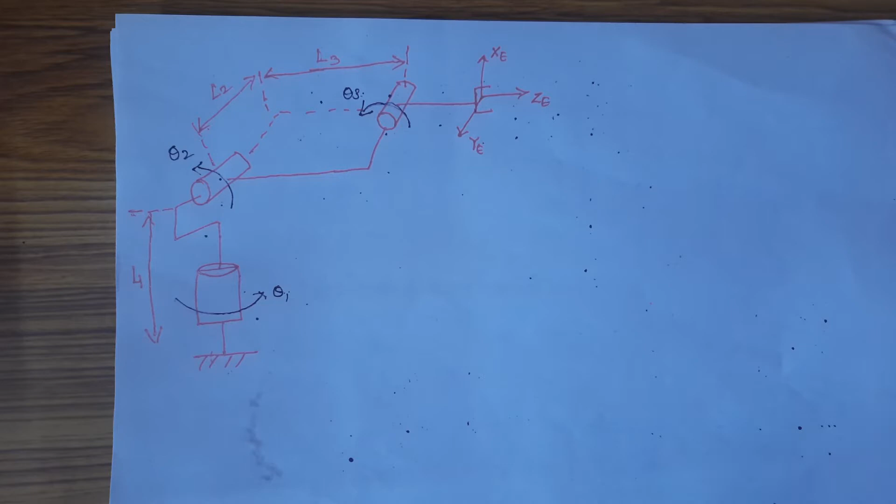Hello guys, so this is one of the problems that we are having. We'll be having three joints, one, two, three, and we'll be having the link lengths. We need to find out the first thing we have to do: assign the frames for the three joints, then draw the DH table, and third we have to go for the transformation.

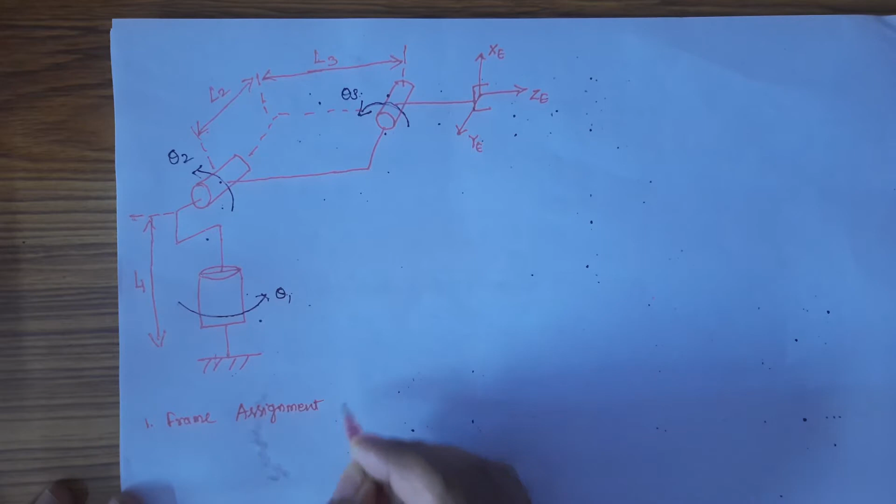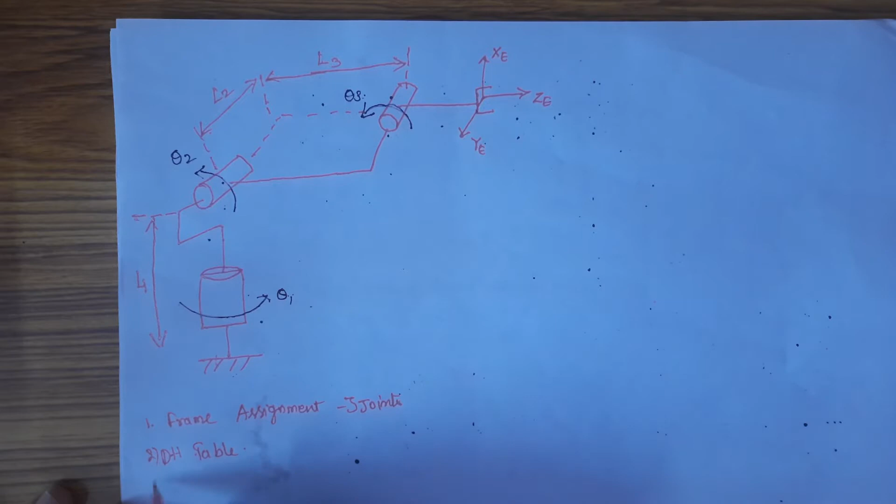So we have to do the steps one by one. The first one will be the frame assignment for three joints, and the next one will be the DH table. Third one will be the transformation matrix. So let us start with the first step.

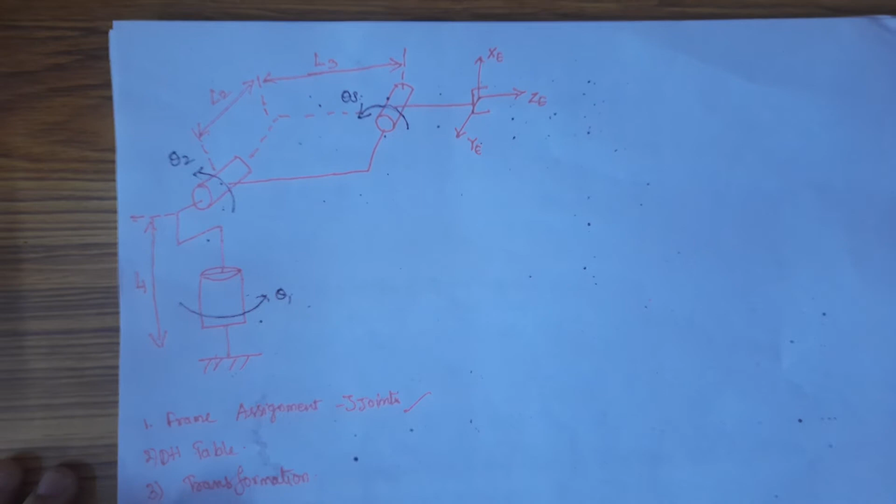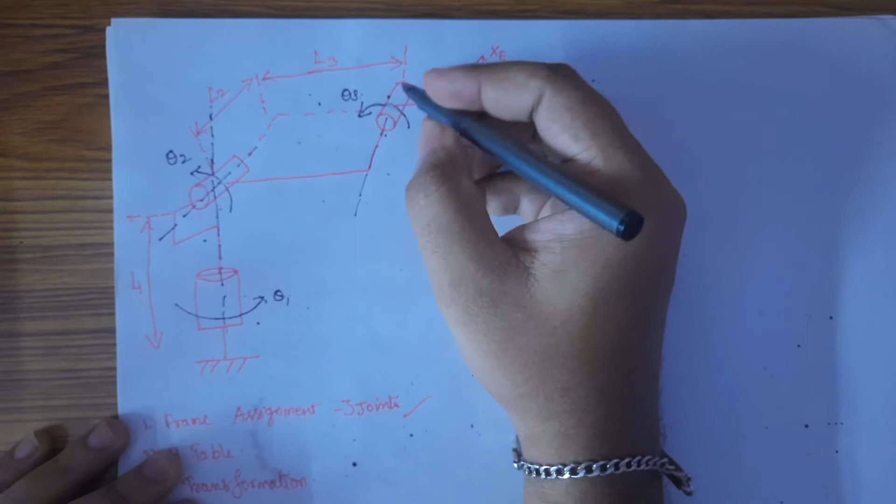So this is the figure that we are having. We have to draw an axis like this, so this is the axis that we are having, and this is one more axis. We know the rules, right? So we have the three axes here, with the angles theta 1, theta 2, and theta 3, and we have to first go for assigning the z axis.

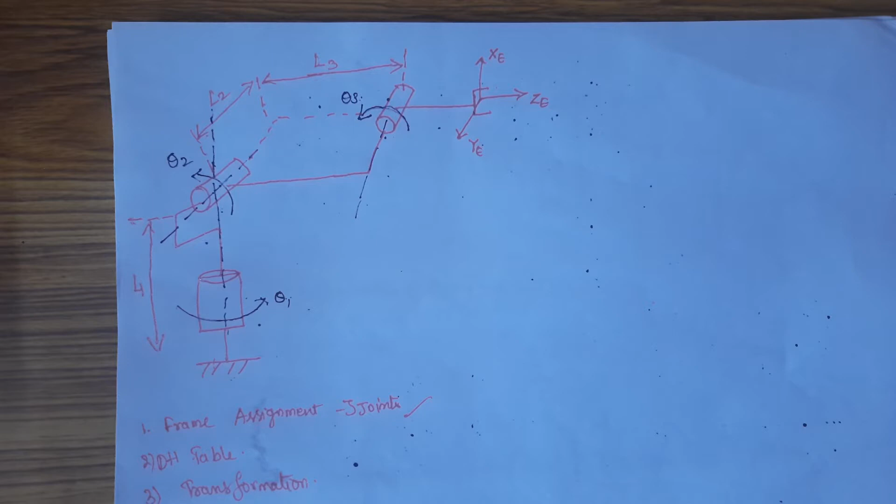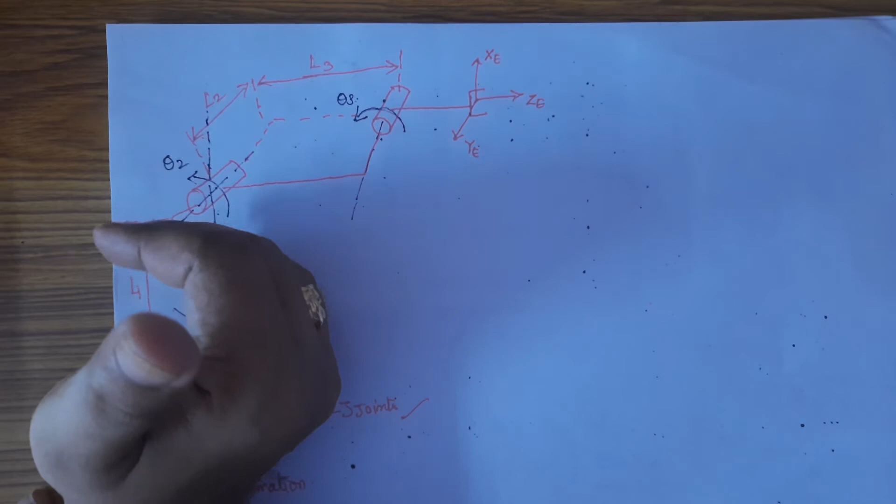The z axis will follow the right hand thumb rule. So as it is like this, our right hand will be closing like this, and the z axis will be pointing in an upward direction. So the z axis will be in the upward direction.

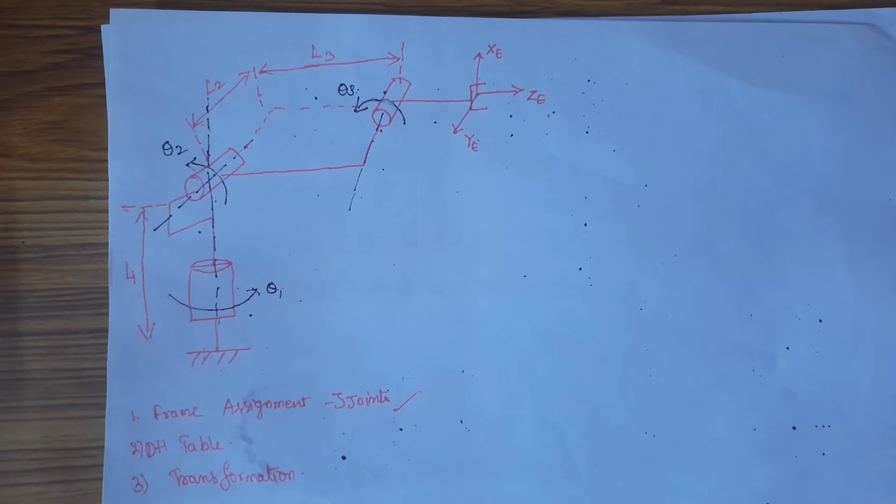Later the rotation is like this, so then the z axis will be like this. Again the rotation is like this. In these rotations, we will be taking the anti-clockwise direction as positive and the clockwise direction as negative. Just follow those rules.

First we have to take the right hand thumb rule, and the fingers will be pointing in the theta direction, whatever the fingers are doing, that follows the theta direction, and the thumb will be the axis direction. So this will be z1, this will be z2, and this will be z3.

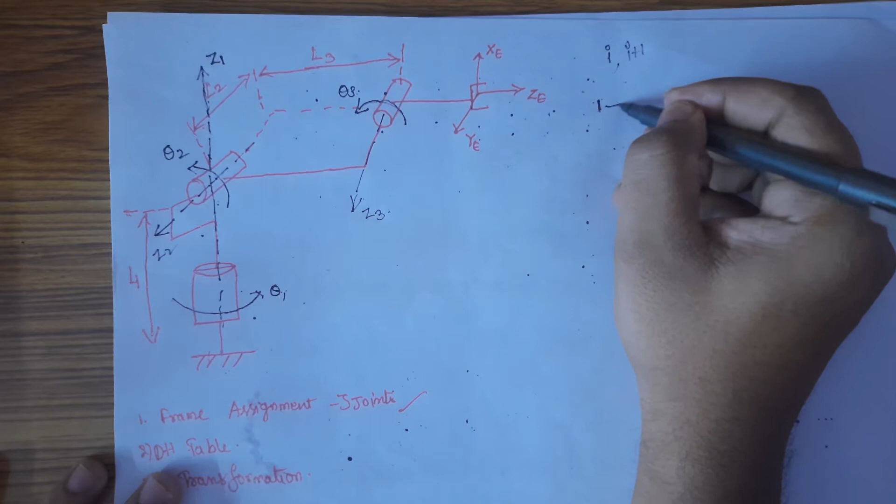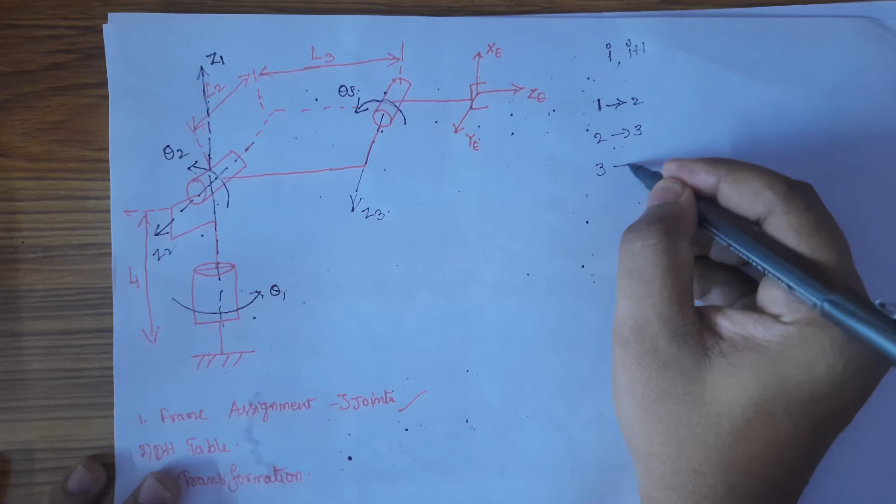These are the three things, and the tool position is already given. We have to follow the rule of i and i plus 1. That means when we are considering joint 1, we have to consider joint 2 also. When we are taking joint 2, we have to take into consideration joint 3 also, and when we are looking at joint 3, we go for the last one. These are the steps we need to follow while assigning the frames.

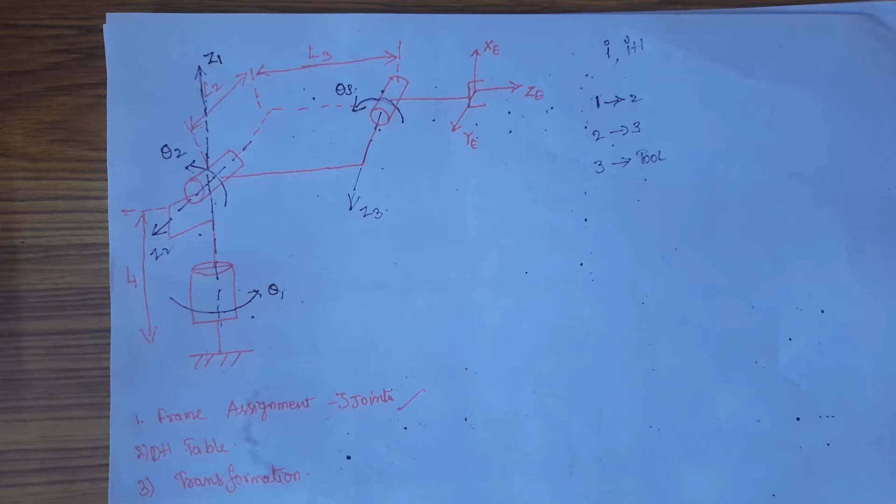So if you go for the origin, this will be the origin, as it is connecting the two things. While going for the first joint, this will be the starting point, and we have to assign the x-axis.

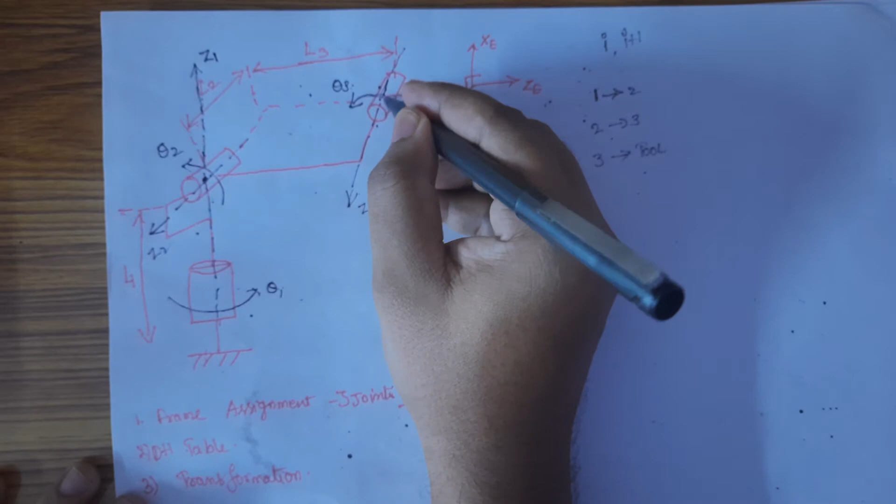While taking joint 2, we have to consider joint 3. So here will be the origin for joint 3, and we have to consider the x-axis. The x-axis will be perpendicular to the z-axis. So z1 is like this, and we have to draw the axis like this, so this will be x1. Since z2 is like this, we have to follow the same thing, x2.

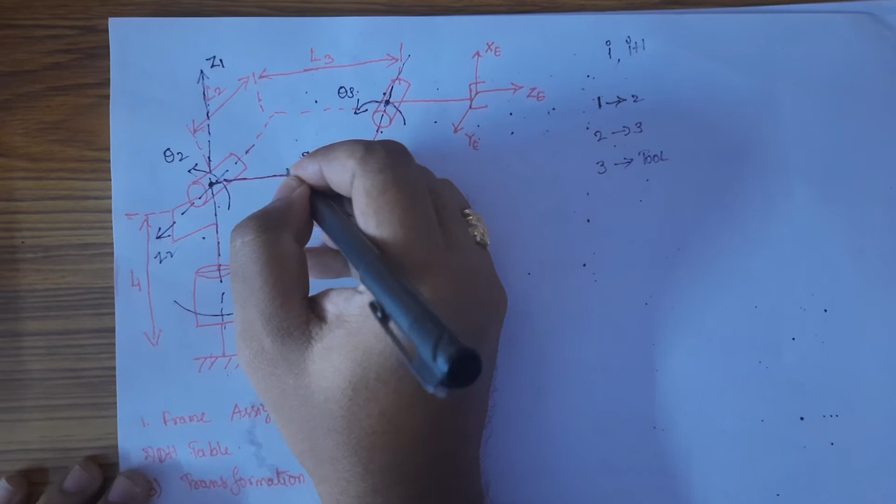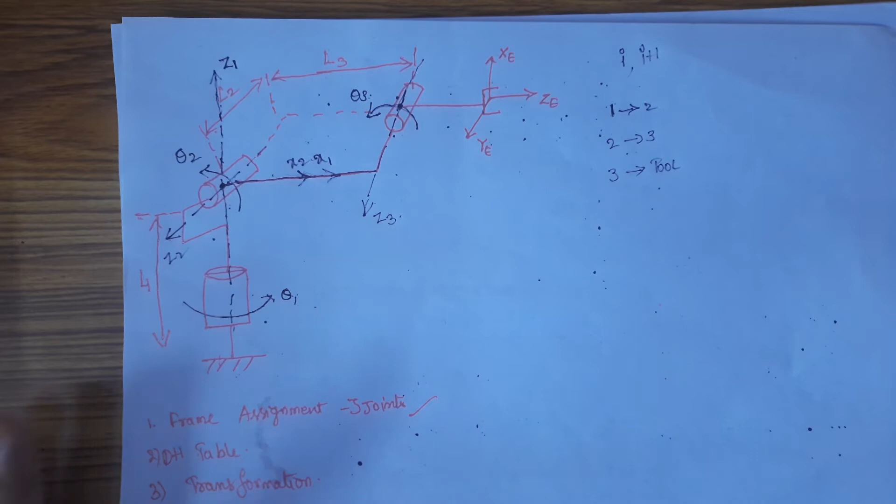So we have to draw a common perpendicular to z2 and z3, and this will be the x-axis. The x-axis will be perpendicular to the z-axis. Just remember that rule, because always keep it in mind: if two axes are intersecting, then the x-axis will be the normal to it.

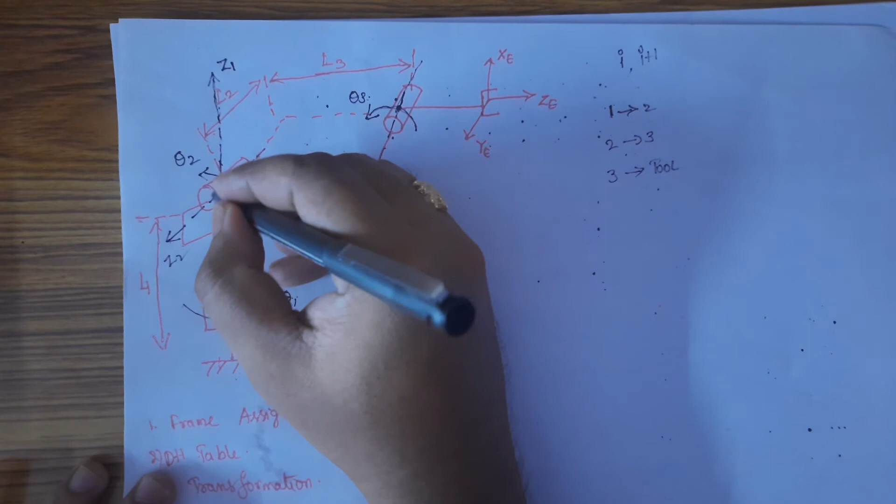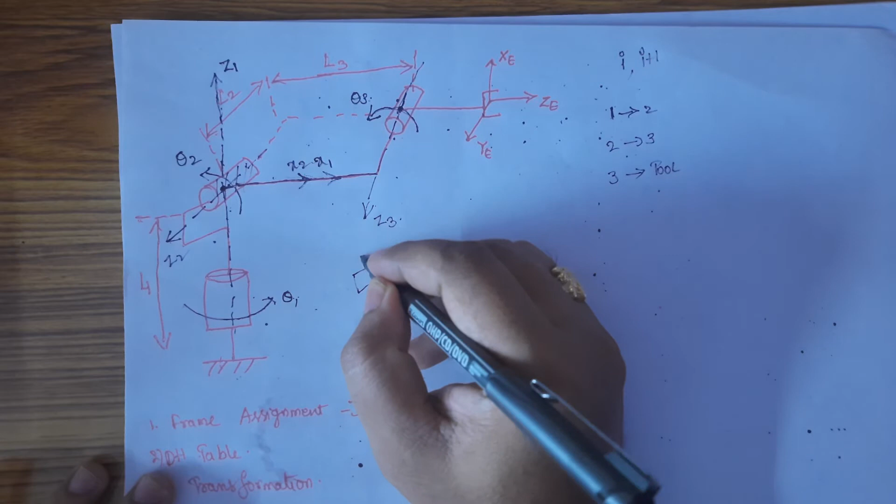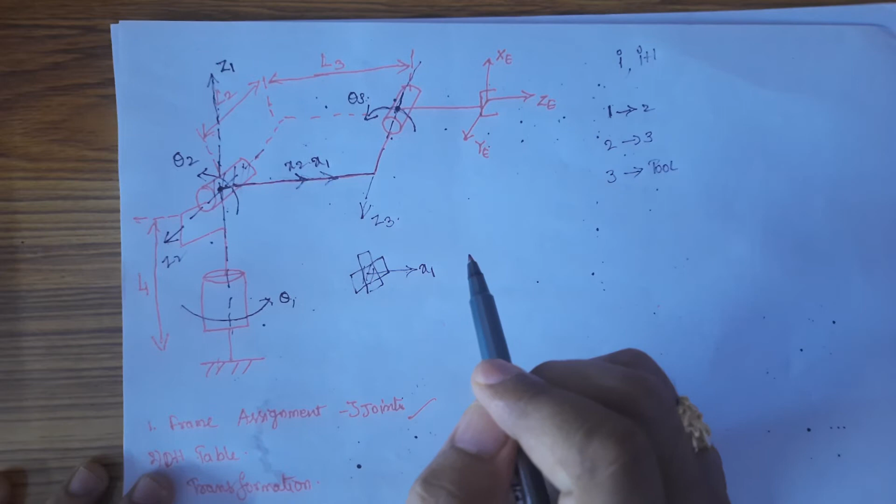We already know that rule, as the two axes are intersecting here only. Suppose we are having a plane like this and one more plane like this, and both are intersecting at this point, so we will be drawing the common normal to that. The x-axis will be in the common normal direction, that's why we have taken it in this direction also.

So we have to keep both the rules in mind: the x-axis must be perpendicular to the z-axis, as well as if the both axes are intersecting in a single plane, then the x-axis will be normal to that. We have to keep these rules in mind.

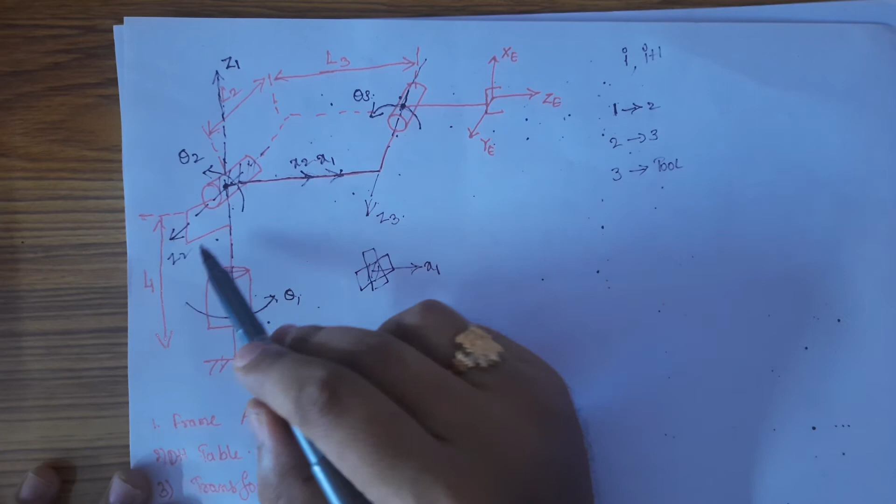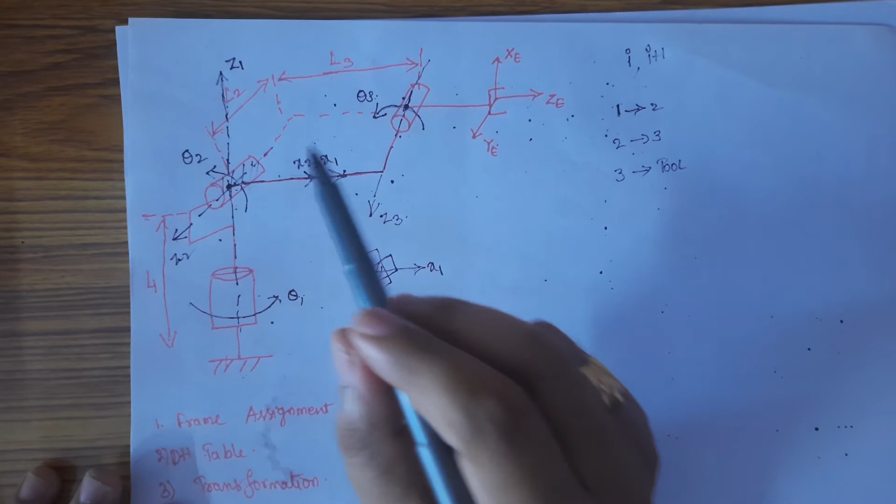Okay, so as we have taken 1 to 2, we have drawn it as x1 here. And if we go for 2 to 3, that is z2 to z3, we will be drawing one common normal and common perpendicular to this, so that the least one we will be taking as the line as the x-axis.

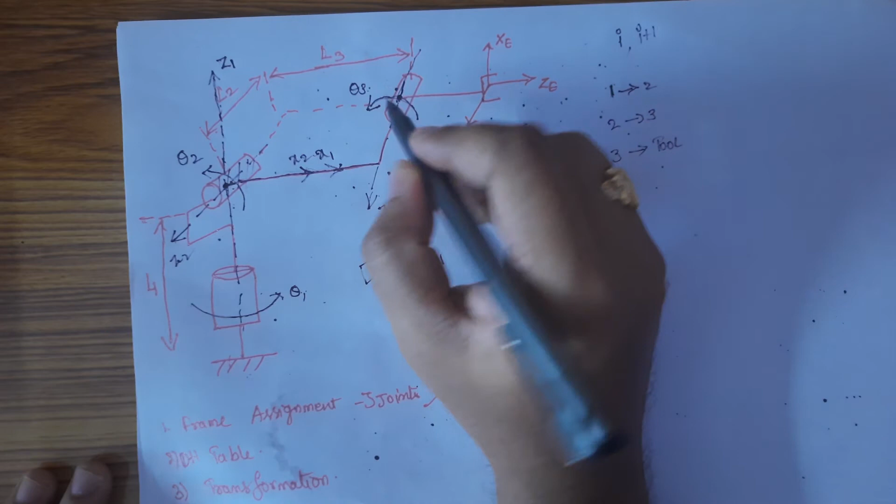Okay, so coming to here, if you consider the third joint, just see here, we'll be having a plane like this, and we are having the plane like this. So we will be having a common normal like this.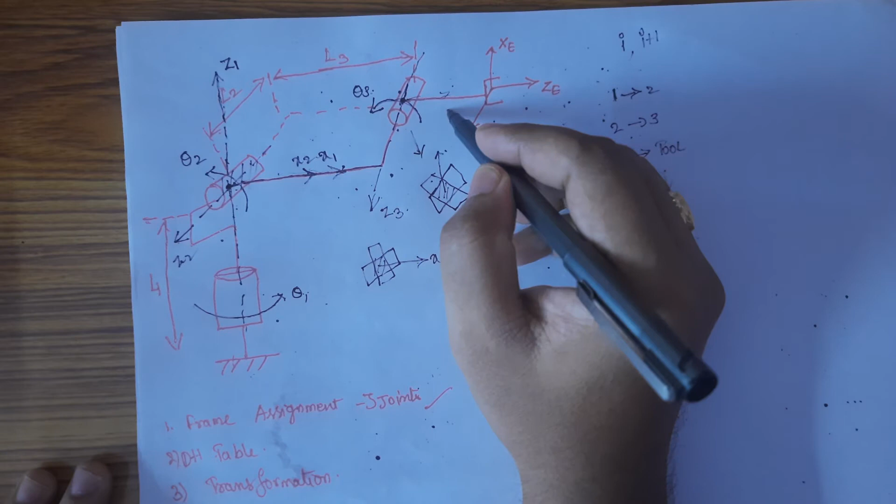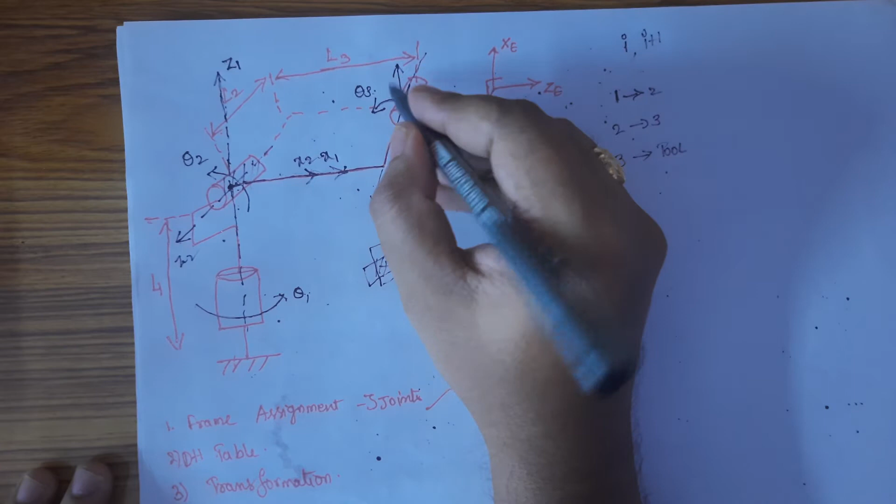Okay, so always remember the x-axis must be perpendicular to the z-axis. If we draw like this, this won't be perpendicular to this z-axis, it will be parallel instead. So we should not draw that. That's why I am going for drawing the x-axis perpendicular to this, that is x3.

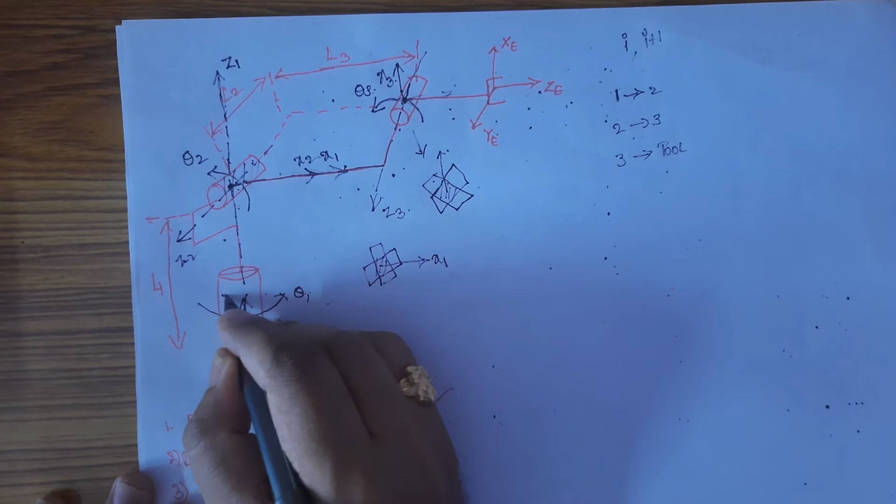So we'll be assigning the bottommost, that is z naught here. Z naught is like this, and x naught will be like this.

So the next step will be finding the DH table. You already know how to draw that. So we'll be taking the links in the first column: link 1, 2 and 3.

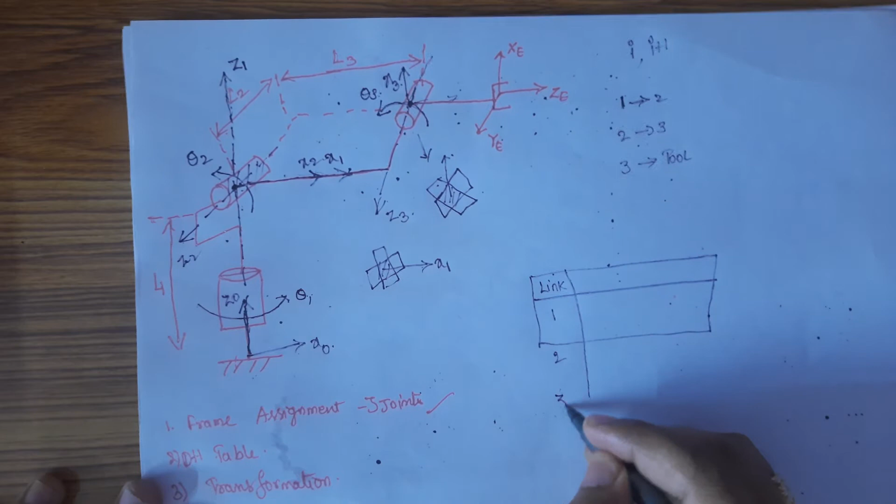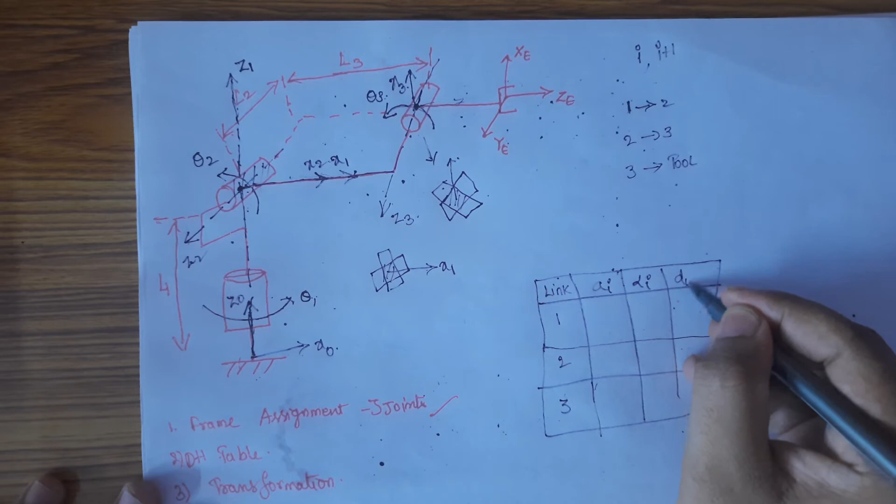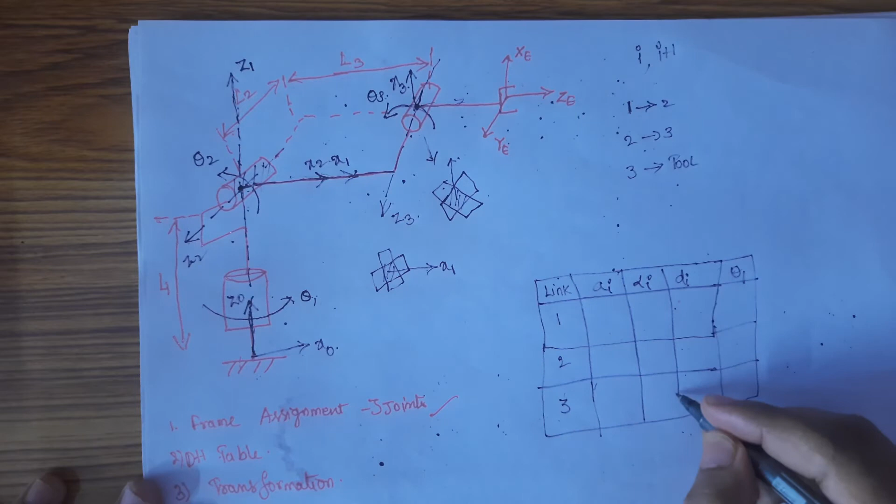Right, so next we'll be taking as link length Ai, alpha I, di and theta I. So these are the four parameters that we need to know.

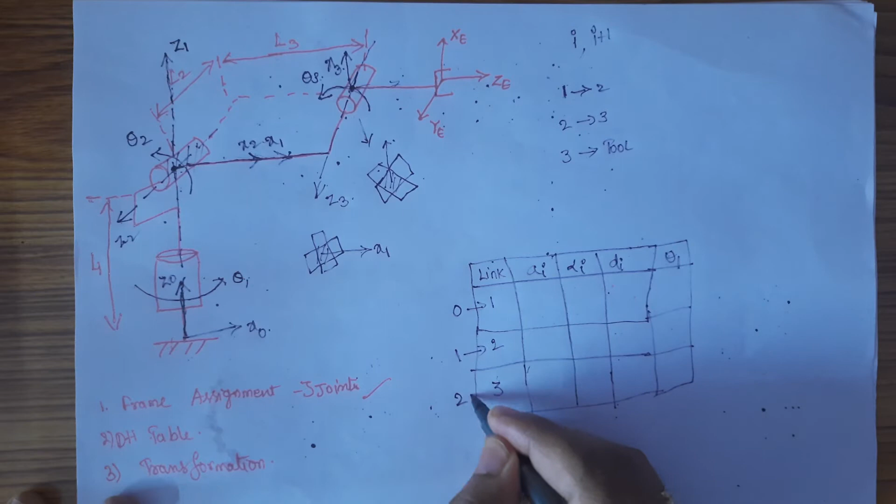So the first link we are taking as 0 to 1, 1 to 2, and 2 to 3, that's what we will take it as. So the first one is 0 to 1, that is nothing but link 0 to 1. So we'll be having a link length of 0 to 1, which is L1.

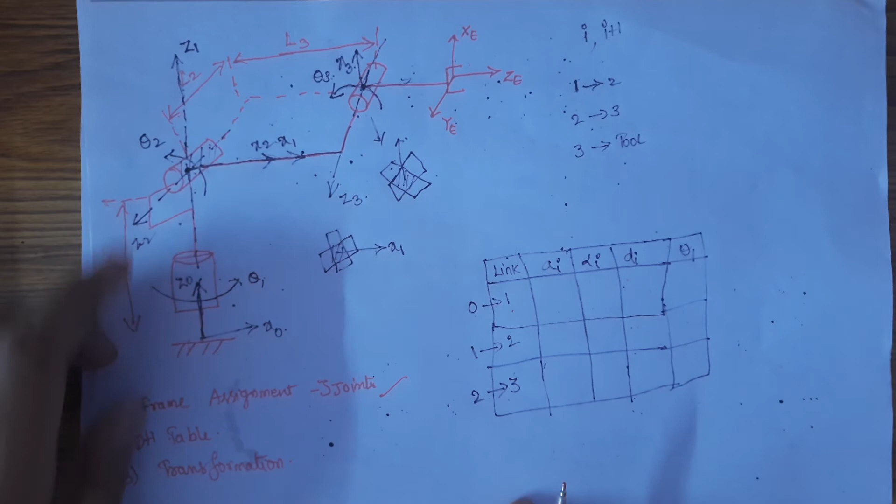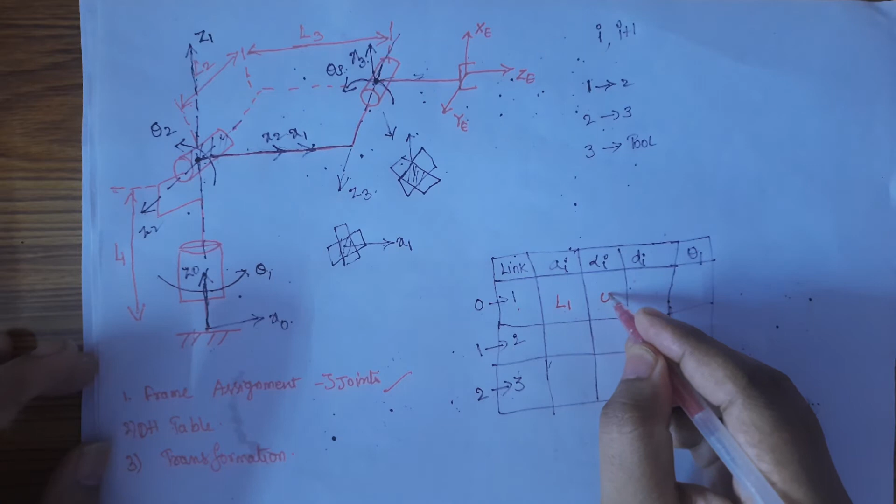So we don't have any offset distance, so the link offset distance will be 0.

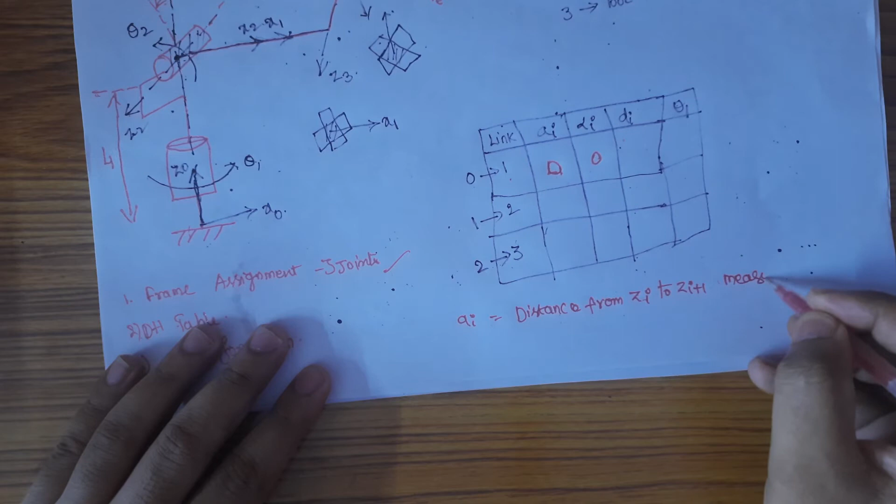So let me tell you some rules here. So Ai is equal to the distance from zi to zi plus 1, measured along xi.

Okay, so next will be alpha I, that is angle of twist, from zi to zi plus 1, measured along xi.

So the next one will be di. That is the distance from xi minus 1 to xi, measured along zi.

Okay, so the last rule will be theta I. Theta I is the angle from xi minus 1 to xi, measured along zi.

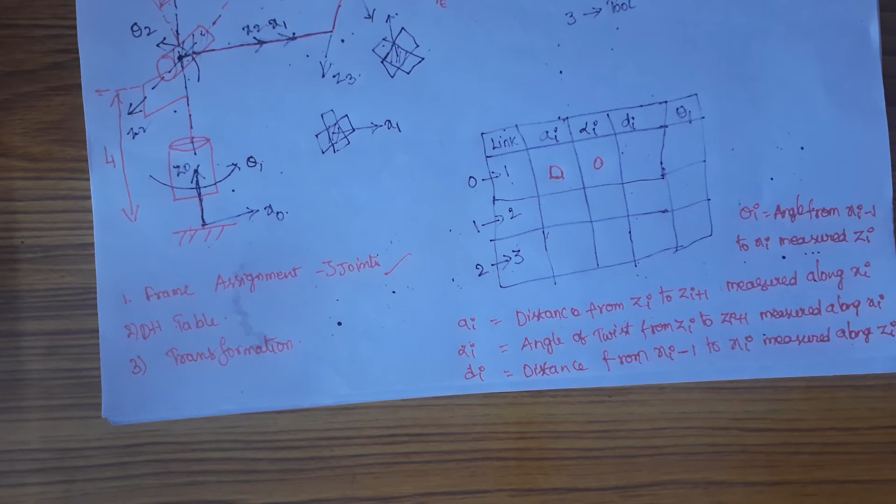Right, so these are the four rules that we need to follow. So the first thing we'll be considering is i equal to 0, and next we are going to consider i equal to 1.

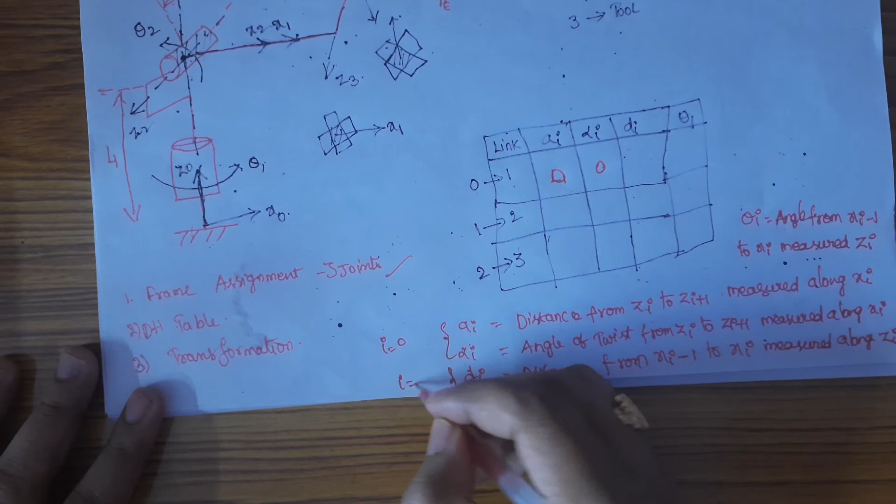Okay, so Ai is nothing but the distance from zi to zi plus 1. So z naught to z1 measured along the x-axis, we'll be measuring along x naught, that is the distance from z naught to z1.

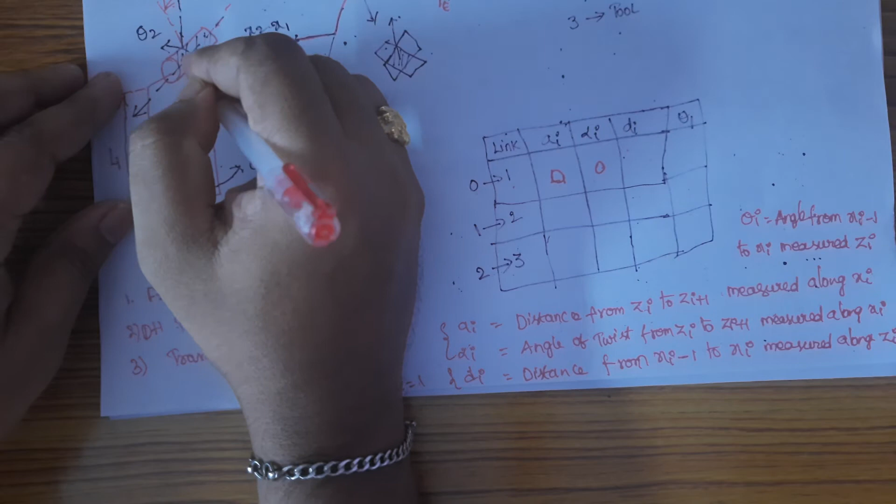Since both are in the same plane, both are in the same line of action, so we don't have any length. If it is in the same line of action, there won't be any distance, so that's why we have taken it as 0.

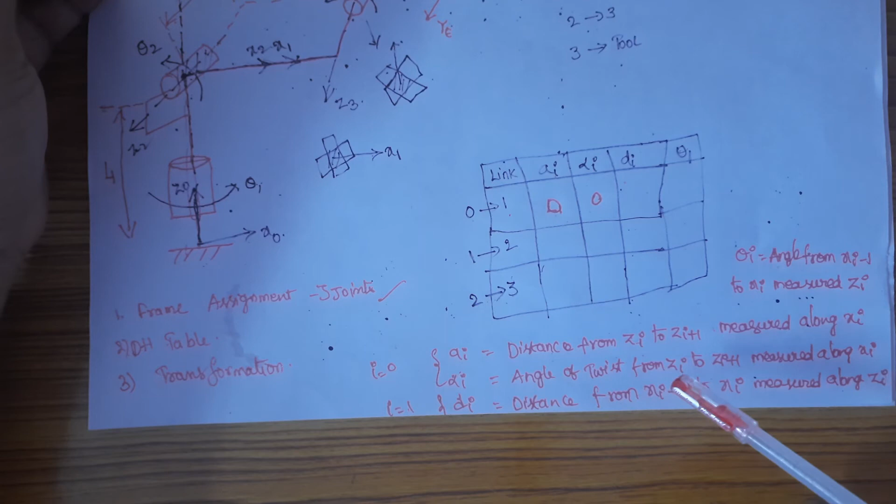And alpha I is nothing but the angle of twist from z0 to z1, measured along the x0. So we don't have any type of twist to reach z0 to z1, so we will take it as 0.

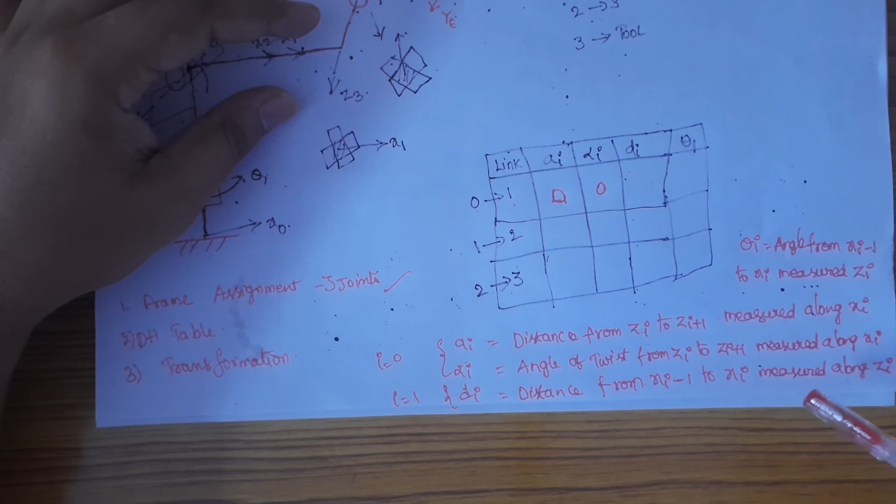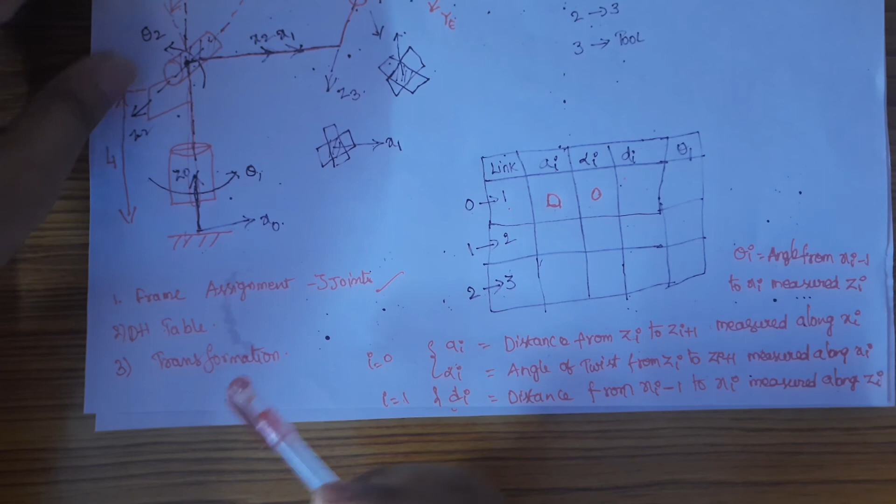And the second thing is distance, that is di, nothing but 1, so x0 to x1, measured along z1. So what distance is there from x0 to x1, measured along z1? That will be L1.

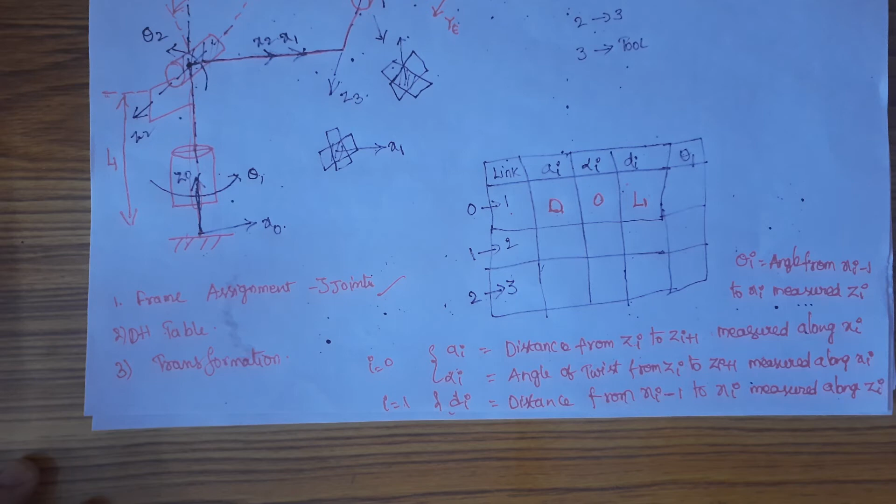So this is how we are going to take the DH table. So the last one will be the angle from x0 to x1 measured along the z-axis. In order to reach x0 to x1, we will be having some angle here, that is theta 1.

Okay, so the next thing is the second link. So 1 to 2 we will go to measure.

So here i is equal to 1, we'll be making it as i is equal to 1 and i is equal to 2 for the next 2 terms. So ai is nothing but the distance from z1 to z2 measured along the x-axis. So z1 and z2 are in the same plane, so that's why we are going to take it as 0. Next, angle of twist from z1 to z2 measured along x-axis.

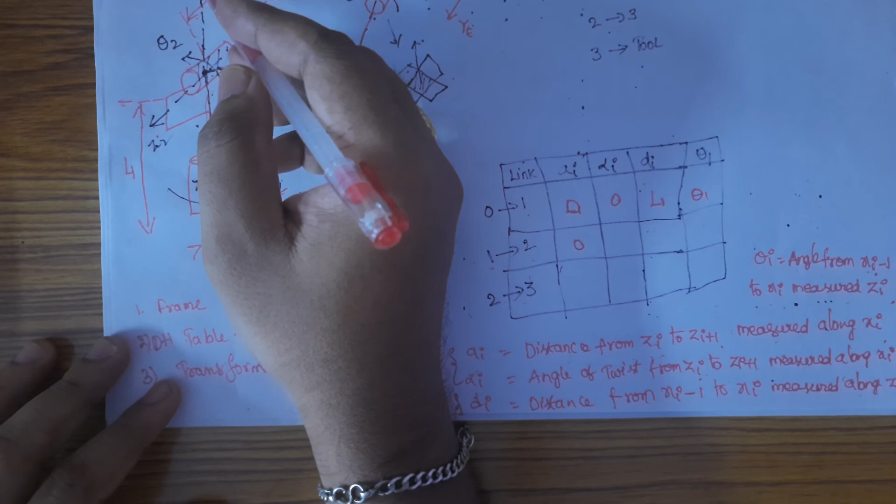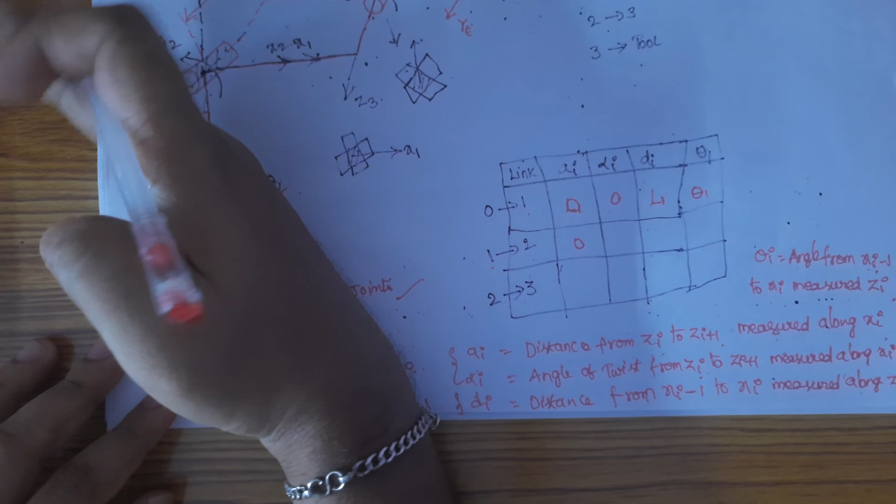So here z1 is in the upward direction and z2 is in the downward direction. In order to reach z1 to z2 measured along x-axis, we have to rotate something like this, so we'll be having some twist here. The twist will be taken as 90 degrees, and this will be plus because we have to rotate it in the anti-clockwise direction to reach z2.

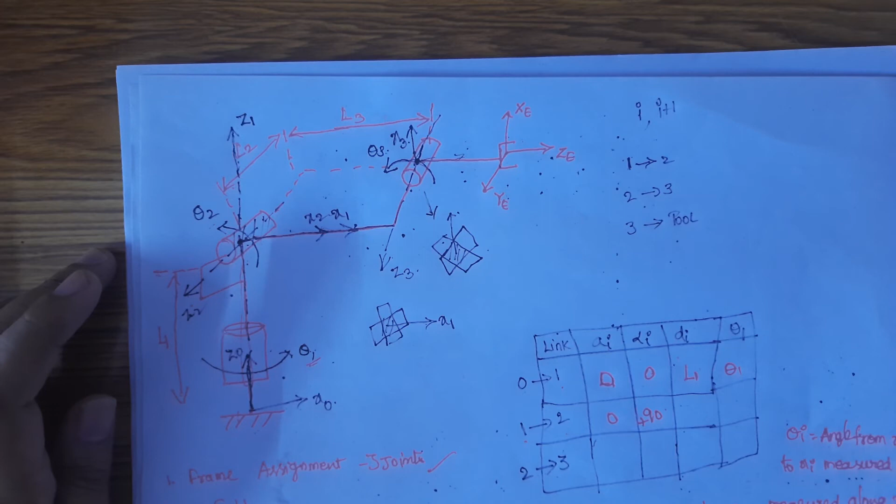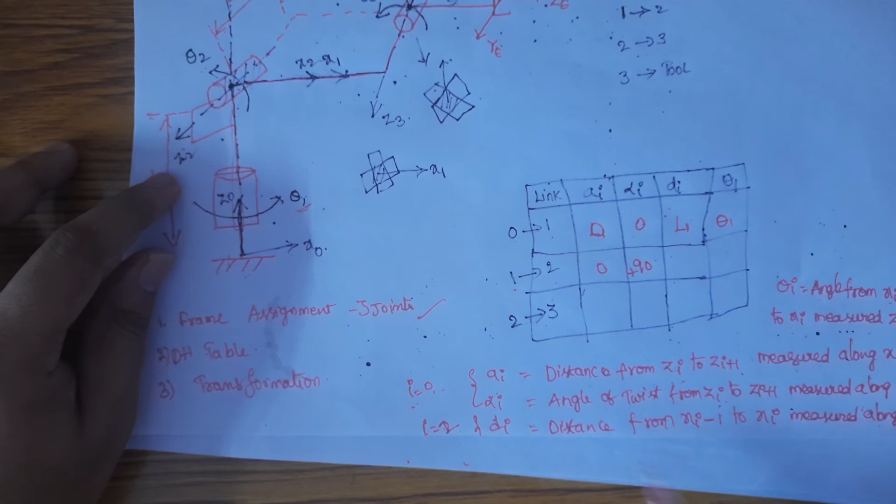So what is the distance from here? The i value will be 2. So distance from x1 to x2 measured along z2 - in order to make this third rule, di, distance from x1 to x2 measured along zi. So x1 to x2 are both in the same plane, so we have to write 0.

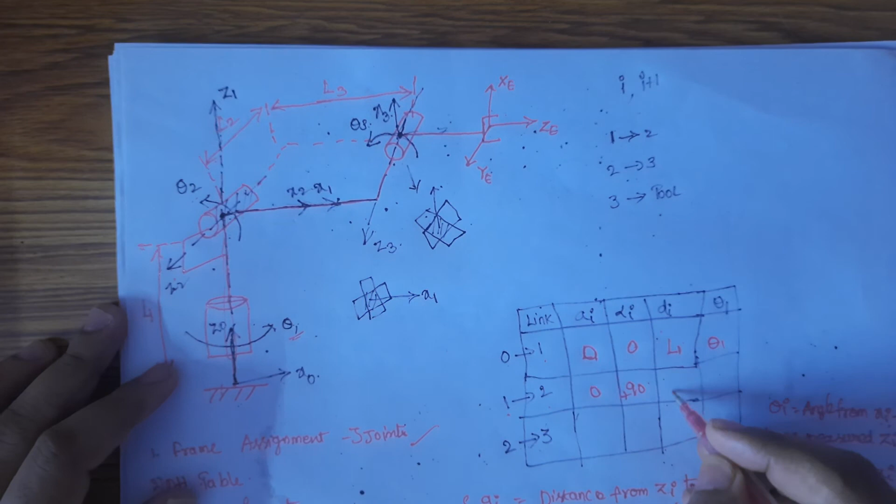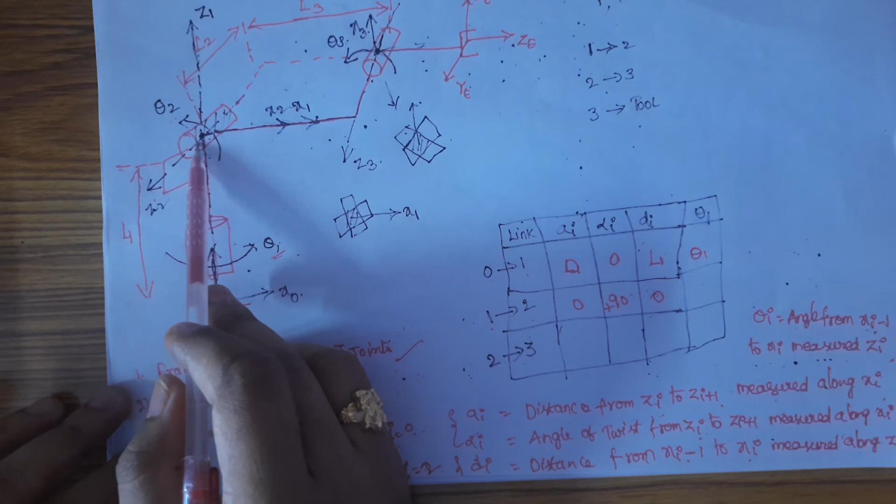So the last one, the angle from x1 to x2 measured along zi - sorry, measured along z2. So we'll be having the angle from x1 to x2, so we have some rotation here, theta 2. Because it is a revolute joint, we have to write it as theta 2. Of course both are in the same plane, but it has made some rotation in order to reach x2, so we have to write theta 2 here.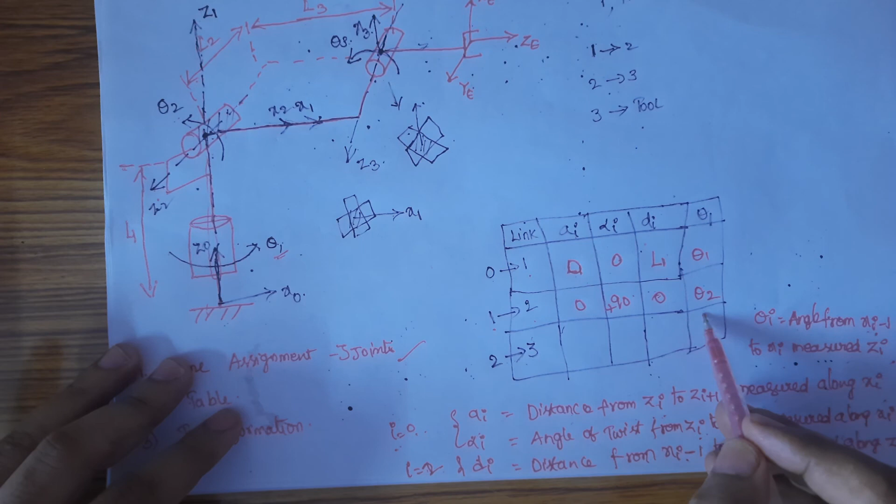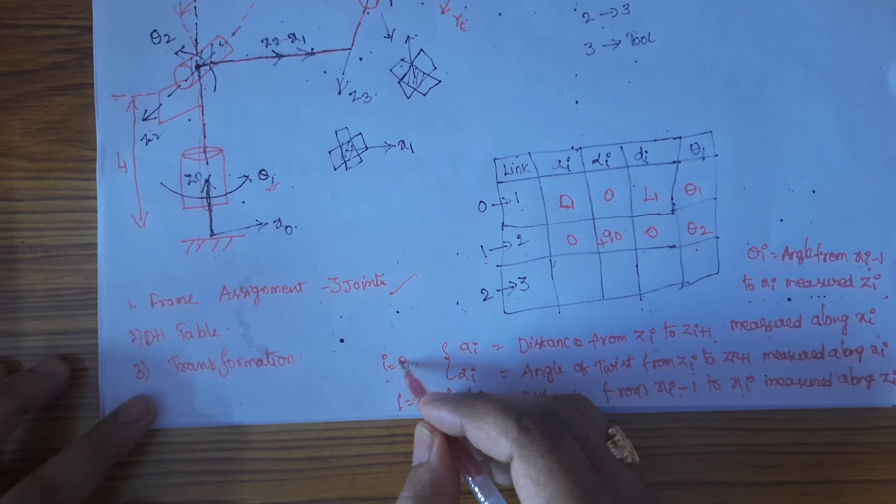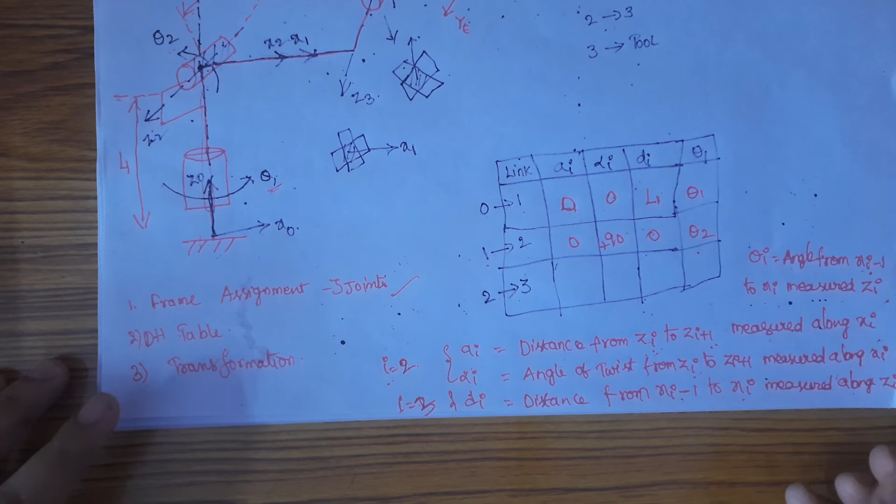So the last one will be 2 to 3, so we will be considering this as 2, and this will be as 3. Distance from z2 to z3, measured along x-axis, that is x2. So we will be measuring along x2 the distance from z2 to z3, and that will be L3.

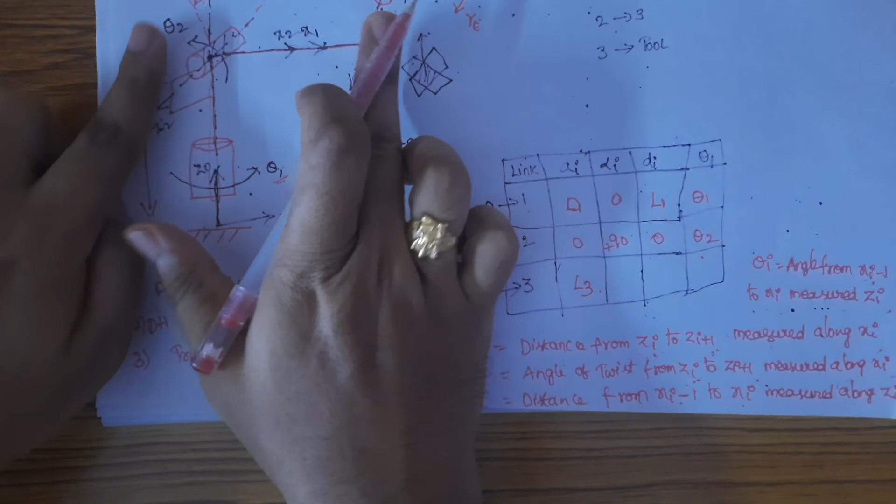The next one will be the angle of twist from z2 to z3 measured along x2. So z2 to z3, we don't have any type of angle of twist to reach, because we both are in the same planes. So that's why we don't have any angle of twist.

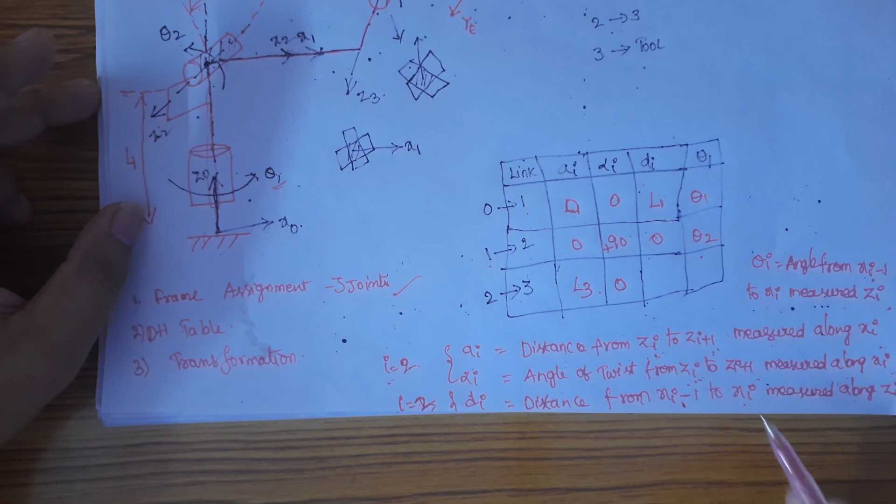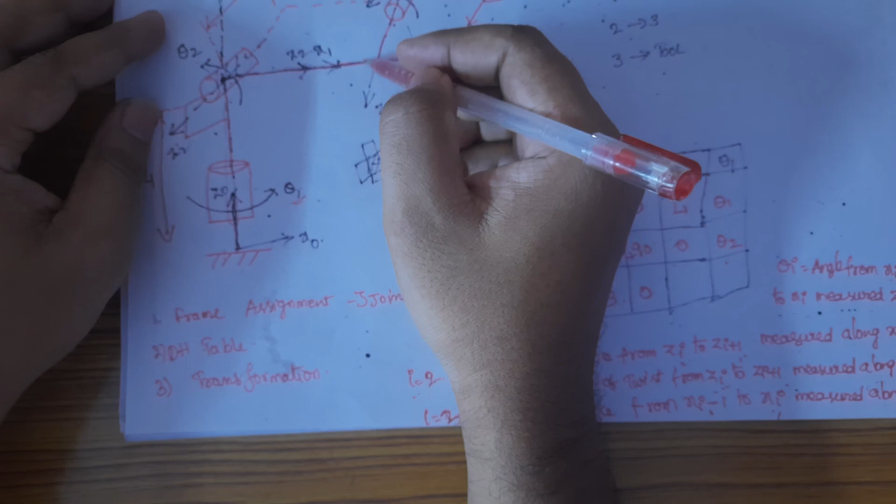So the next one will be the distance from x2 to x3 measured along z axis. So x2 to x3, we will be having something like this will be the length. If we are measuring the distance from x2 to x3, we have some length, L2. So as it is here and moving towards the upward direction, we will be taking it as minus L2.

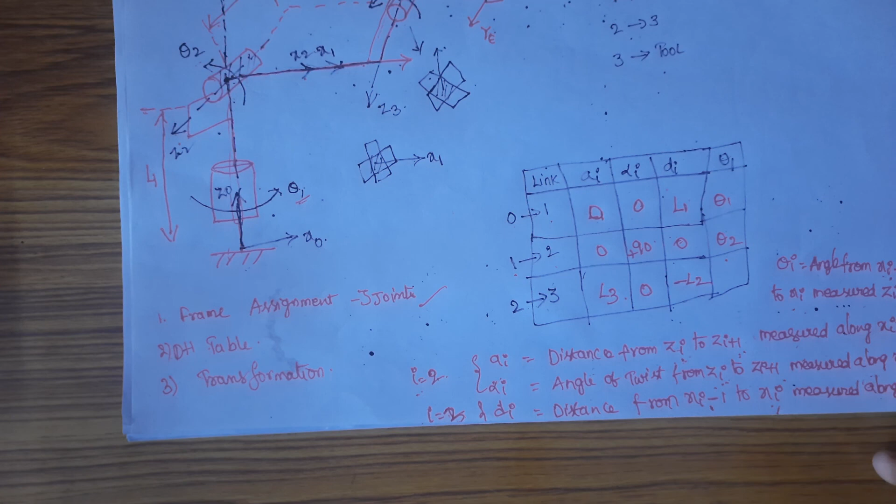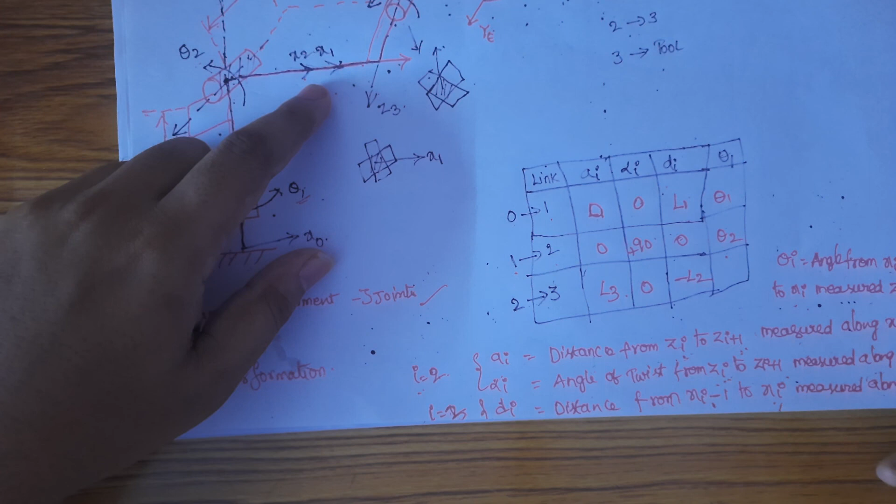And the last one will be the angle - just see it carefully. The angle from x2 to x3 measured along z axis, that is z3. Here x3 is pointing in the upward direction and x2 is pointing in the horizontal way. In order to reach x3, it has to be rotated at an angle of theta 3, but it is in the upward direction. In order to reach this x2 value, it has to rotate an angle of 90 degrees, so plus 90 degrees. So this is the final thing.

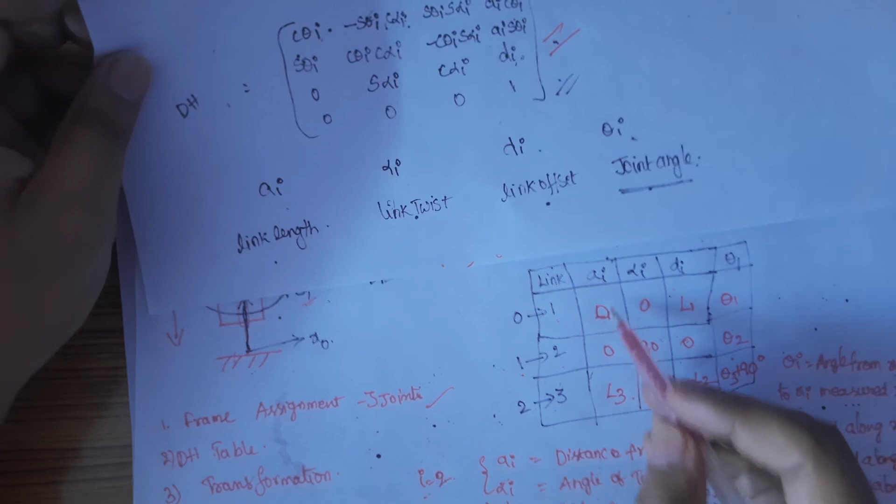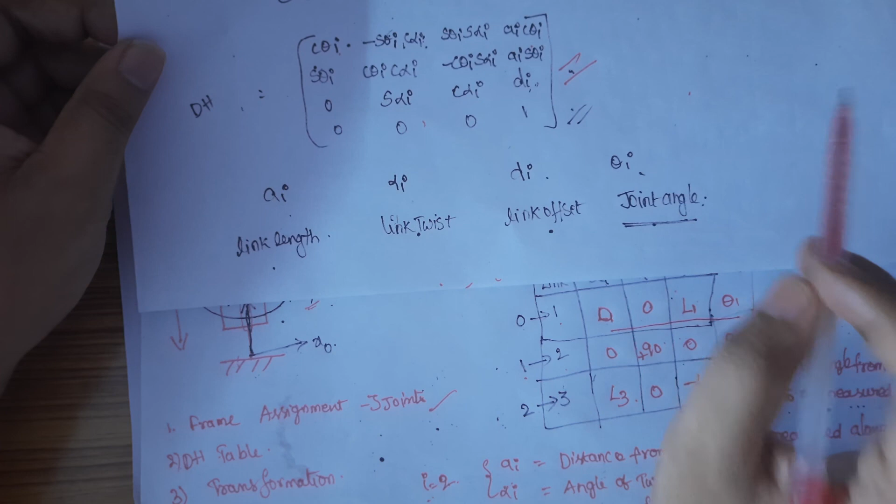So we have got the DH table and we have to substitute it in the transformation matrices that we are already having. This is the formula that we are having. Just substitute the values for the first link data, and second link and third link. Once all three are done, we have to multiply all three things and get the final answer. That's your duty now - just substitute those values one by one.